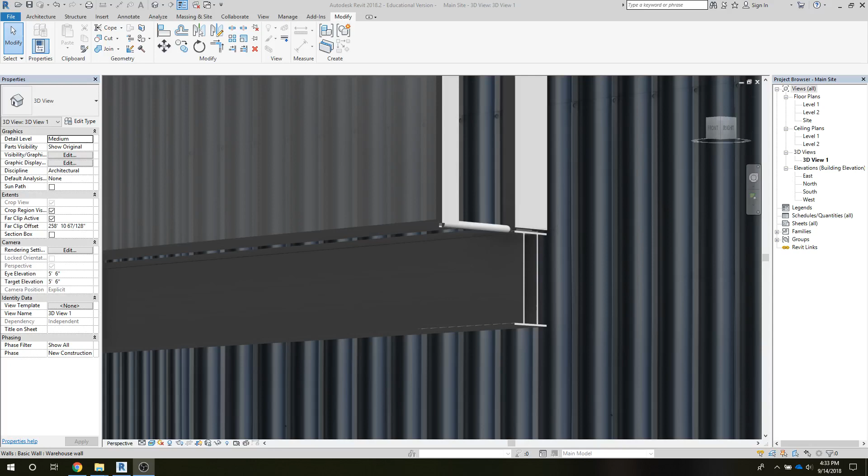So I want to look at constructing a beam to support underneath this now. And you'll notice I've made a relatively small, it's a built-up section, a top plate, two side plates. You could probably maybe think about insulating in between. But most importantly, I've changed my mind about my thinking on this.

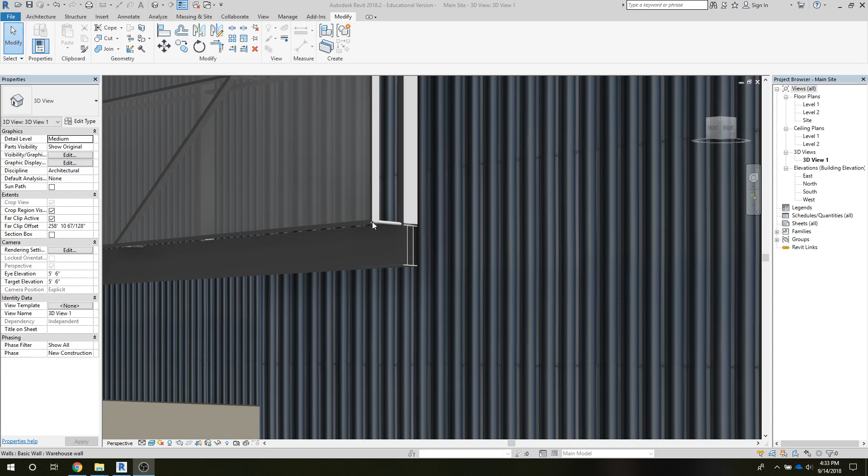I want to extend this out so it actually covers underneath here, and that'll be a way of thinking about sealing that up. So I'm going to go ahead and delete this, and we're going to reconstruct a beam for this. I'm going to try to delete it. There we go. And I'll go to level 2. And we're going to go ahead and create another generic model. But this time it'll span over that.

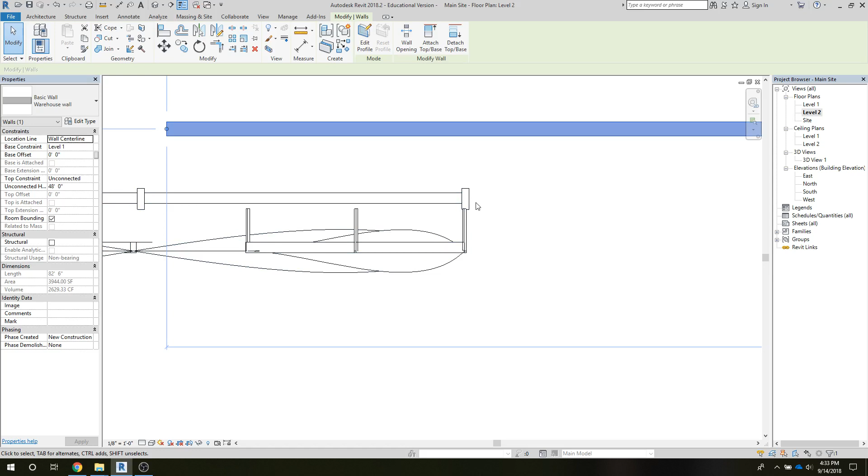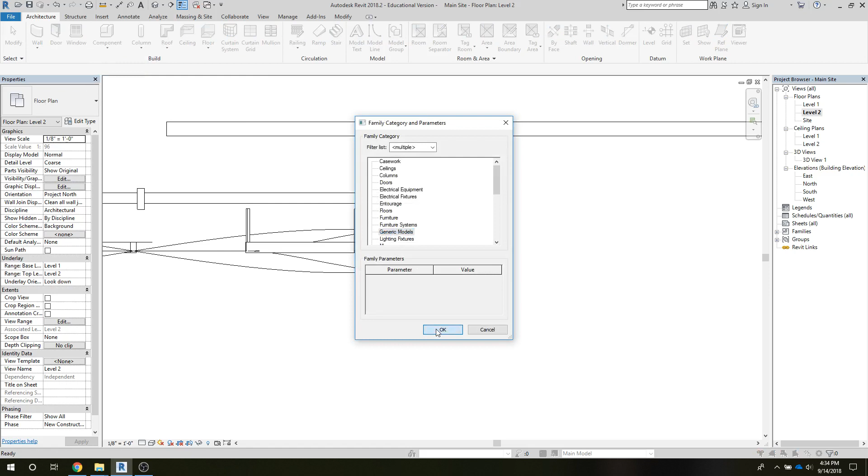And I'm going to create the generic model in plan view because if I try to do it in an elevation view, Revit doesn't have a defined plane yet for that to work on. And I don't want to have to go through doing that element of construction. So I'm going to go to model in place, just a generic model. It's going to be an extrusion of beam. And then we just got to go through some of the thinking about what we want to actually construct here.

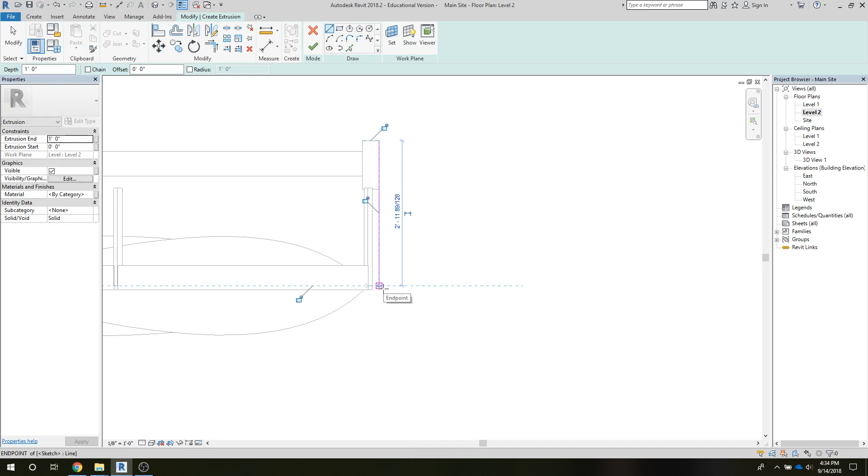So I'll just draw a line. Well, let's just do it at 3 feet. That's the center line of our form system. We'll go ahead now and offset that line by 1/2 inch for the thickness of the steel.

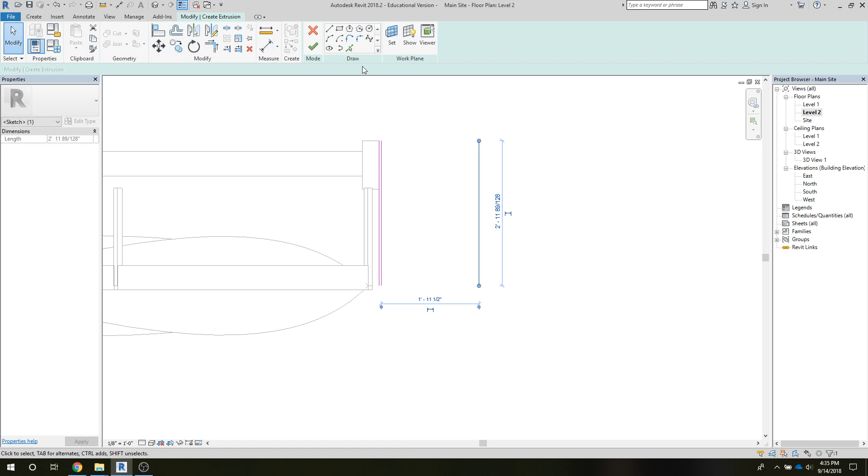And we also want to give this a depth. So let's go ahead. It's going to be at a 12-foot level. So let's make a 2-foot deep beam. That'll give us 2 feet left for our glazing system. So I'm going to just grab that and copy it over 2 feet. And I'm going to then offset that so we come up with our flange again, or material depth.

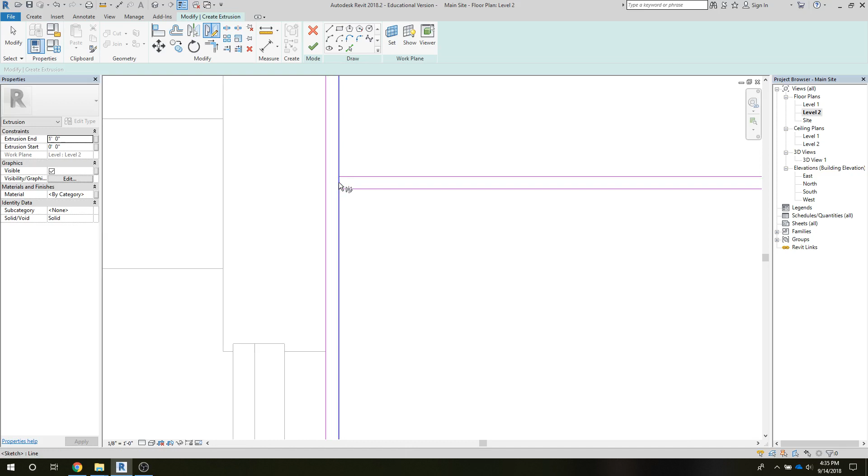And then we're going to just create some kind of a, well, let's say we come in 5 inches, and we'll just go ahead and offset that one also. And I need to clip out... I just don't know how to do that. It'd be just easier for me. I'll just shrink this line down. That'll disconnect it, unjoin elements.

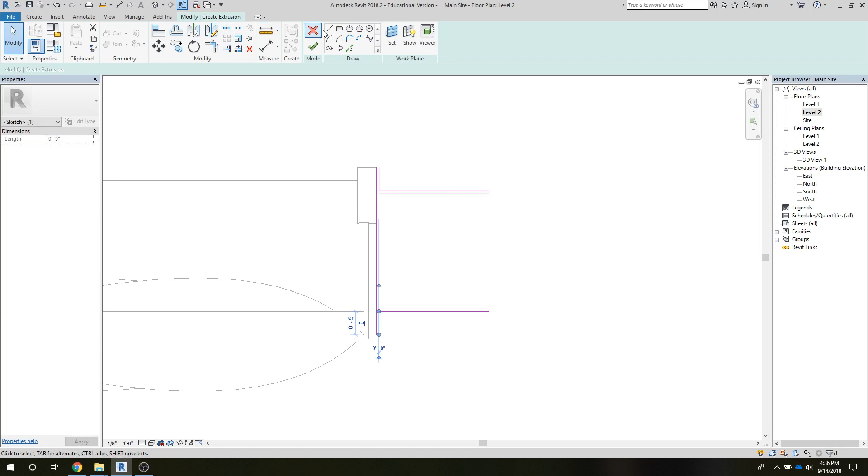And actually what we'll do is I'm going to get rid of this also because we're going to mirror this over when we're done. And we'll grab these two. It's just a matter of me not having thought out how I wanted to actually go about building this. Let's go ahead and mirror it on the center line. And let's go ahead and connect these. I'll go ahead and mirror that over. I'm not getting, oops, I've got, grab those, and we'll mirror that.

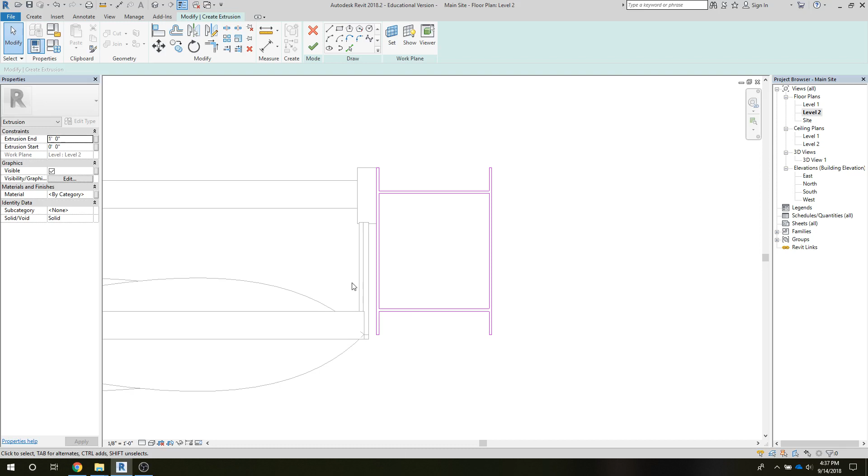Okay, so we have like a box beam section. I've revealed it so that it still has an older kind of I-beam look to it. This would be a welded built-up section. We'll complete it. It'll make an extrusion out of it. Let's go to the south elevation so we can see that element. Zoom out here. I'm going to stretch it down. Oops.

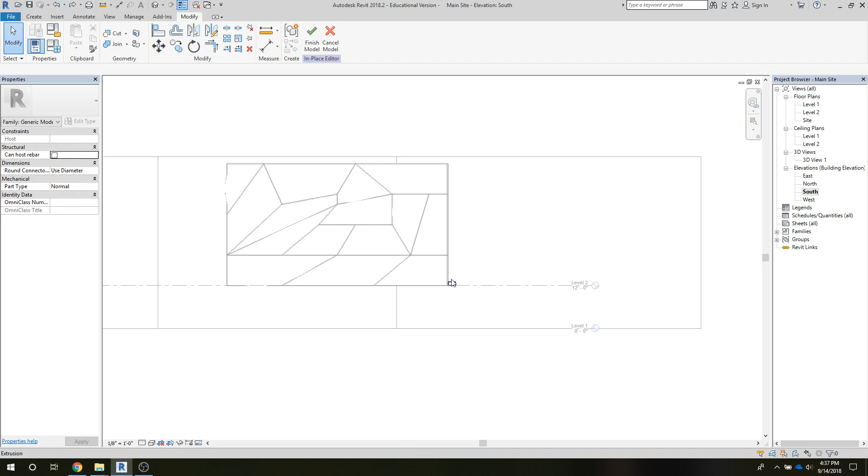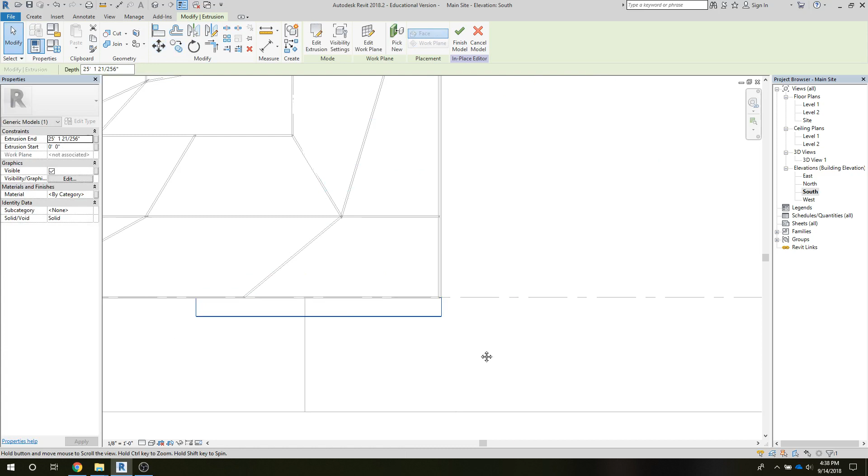It might be, uh-oh. I can move it up. So anyway, I'm going to just rotate this 90 degrees. And let's get it positioned now. I didn't give it a materiality. Well, we'll look at that later on.

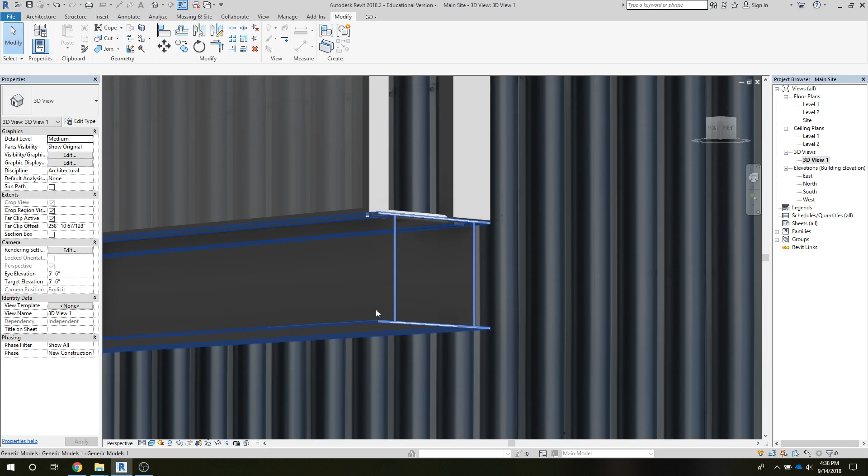Let's take a look at it in 3D view. Okay, so now we have a section underneath here. I mean, these aren't exactly crisp details. We've got things intersecting each other right now, but that just gives us some idea about how we're thinking about supporting our door system.

And the next thing we want to attack is building up our wheels, our locomotive type wheel assembly. So we'll do that in the next clip.